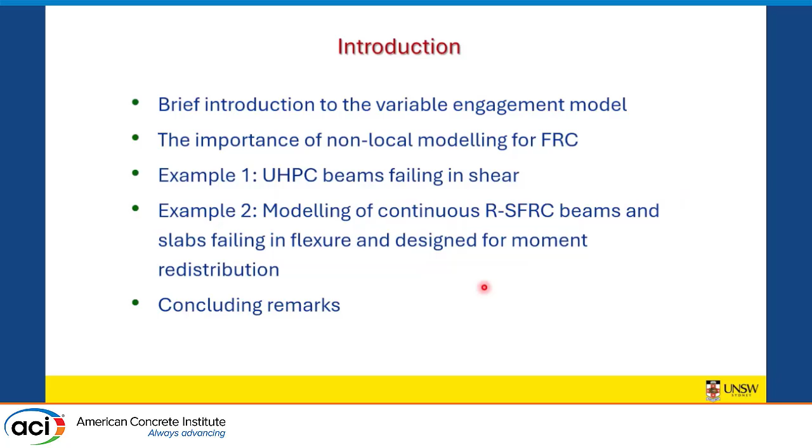I think many of you will know that we invested a lot of time and energy with students in a model which we call the variable engagement model, but I think one of the things that is always nice to know is, well, where did it come from? And it came from this observation.

It was a test by Banthia and Trottier, and we were sitting down one day looking at this particular test. It's a single fibre. We always thought if you could take a single fibre and just add them all up, you should be able to get the end result, right? It's a nice way of thinking of things.

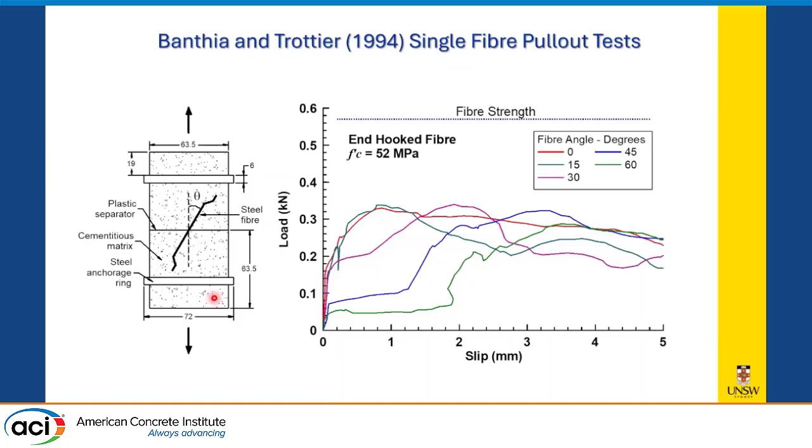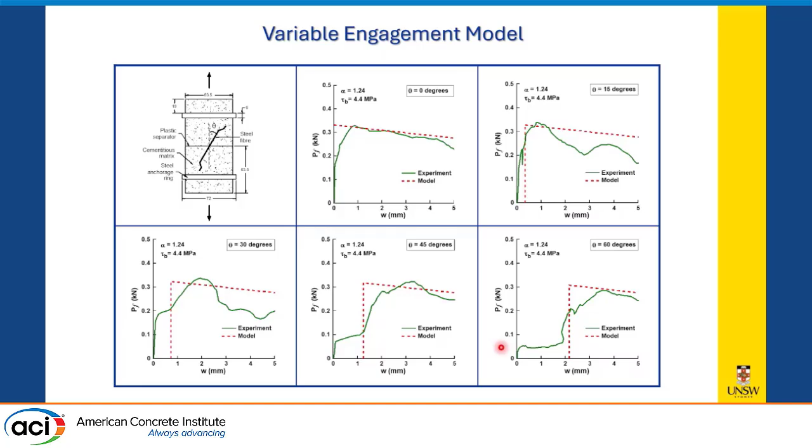And we looked at this and said, well, depending on the angle the fibre's engaged at different points in time, right, you get a lot of initial pull, you get snubbing effects and the like. So this is a fibre at angle 0, it engages quickly. But when you get to fibres up to 45 and 60 degrees, it takes some opening displacement before those fibres actually work for you. So in our domain, where we're looking between maybe 0 and 1.5 millimetres, maybe 2 millimetres, there are a lot of fibres that come in at slight angles that are never going to do anything for you.

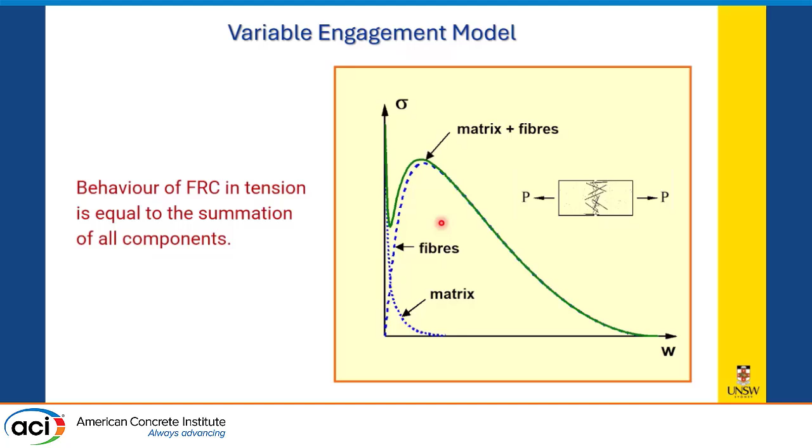And this is it. So you add all that, you integrate every fibre on the surface, you add in the concrete component, and you end up with a curve that looks something like that. And there have been various versions of this over time.

So that was 2003. That was my first, one of my early PhD students, not my first, Jackie Yen Lei Voo, who's moved on to do great work in bridges and ultra-high performance concrete. And this is what it came out to be, really nice.

That global orientation factor just comes into the mathematics that comes out to all those working out what the volume of fibres is, simply the aspect ratio of the fibres, the volume of fibres, and the bond shear stress of a single fibre pulling out, which you should be able to get from tests. Right? So if I do a uniaxial test, I can do a single fibre test at the same time and get that.

In 2007, a student of mine called Greg Lee developed what was called VEM. We renamed that later to VEM 2, Mode 1. He looked at shear. And in shear, the end hook has a lot more importance. In fact, when you look at shear, the straight fibres do nothing. They engage really late, so therefore they effectively don't do anything. So if you don't have a hook, then the fibre doesn't do anything.

Now, this comes to a question which I've never really seen answered yet. So what happens when you have longitudinal shear between the interface of a web and a flange of a beam? Do the fibres actually contribute to that? And I think there's some evidence that they do not. That's an open question.

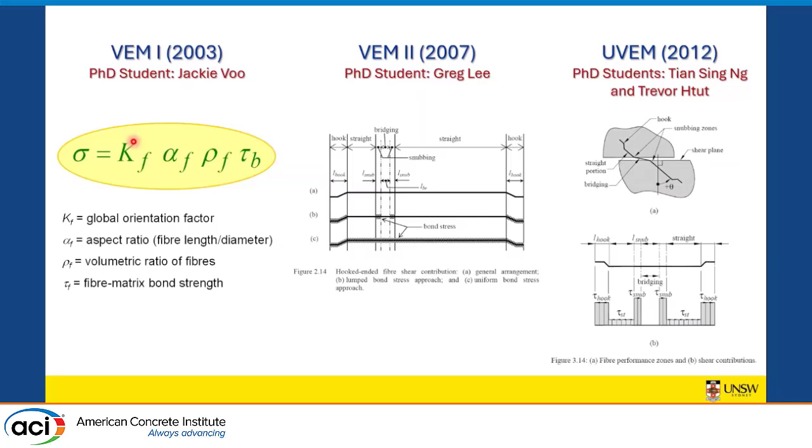And here's the validation of those, and these are tests where they've done the single fibre test to get the actual bond slip of the fibre. So they've actually got that data input into those. And you can see here the models predict the failure, predict the uniaxial strength pretty well.

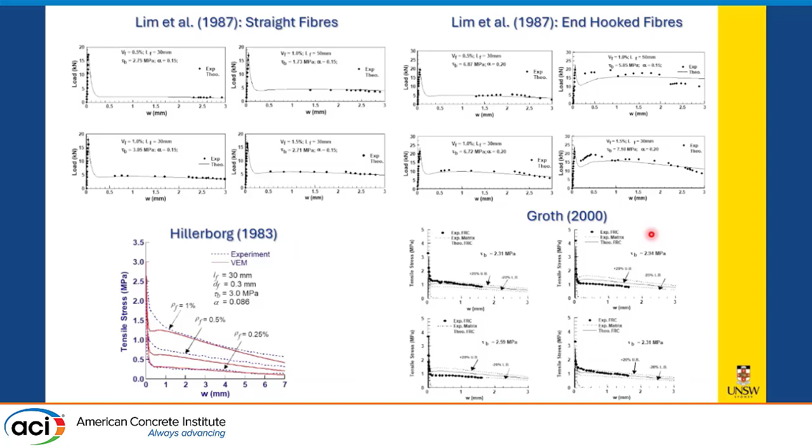Okay, so this comes down to my first example. This is a paper that we presented in Maui. Frank, you might remember, we had a fabulous... I don't remember if you had a car or how we got to the conference venue, or walked.

You went to the car, it was fabulous. We had these really big, luxurious places. Anyway, it was a fabulous conference. One of the things I did mean to mention earlier, I might mention it now, because I've been hearing the last couple of days about Frank and Pink Floyd, right? That's the pacifist Frank. The activist Frank listens to Midnight Oil. That's right, which we found out on one of our great trips.

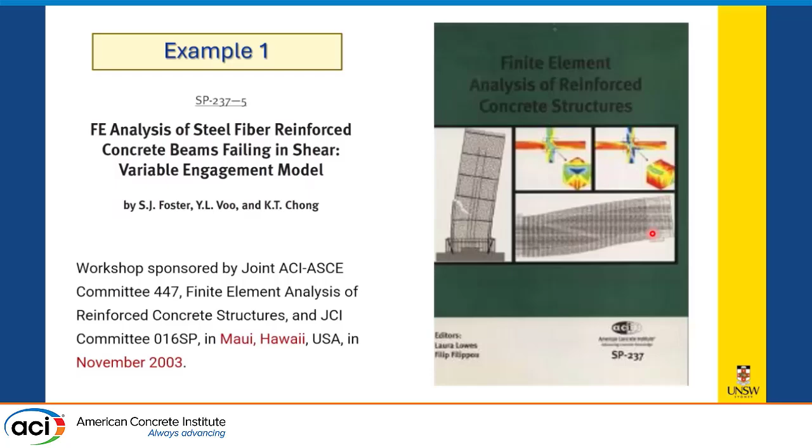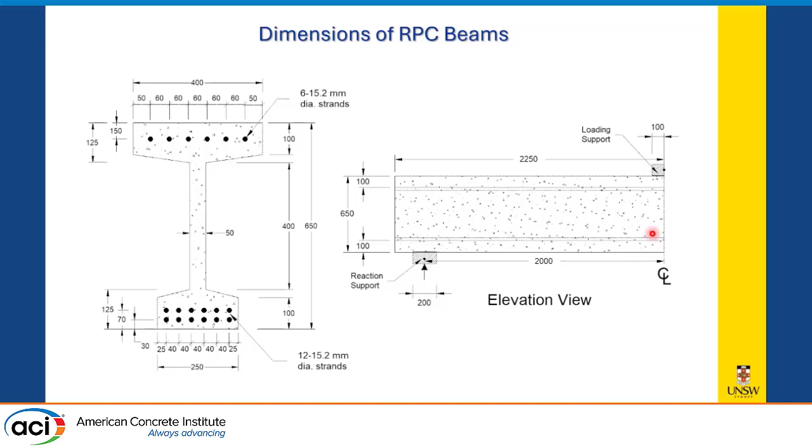Anyway, so we're in Maui, and this is not new work, it's 2003 work. But it comes from the numerical modelling of these tests by Jackie Voo, an ultra-high performance concrete beam, 650 deep, span of 4 metres, with 2.5% fibres, two different types of fibres, end hooked and straight, 170 megapascal concrete, and this is it.

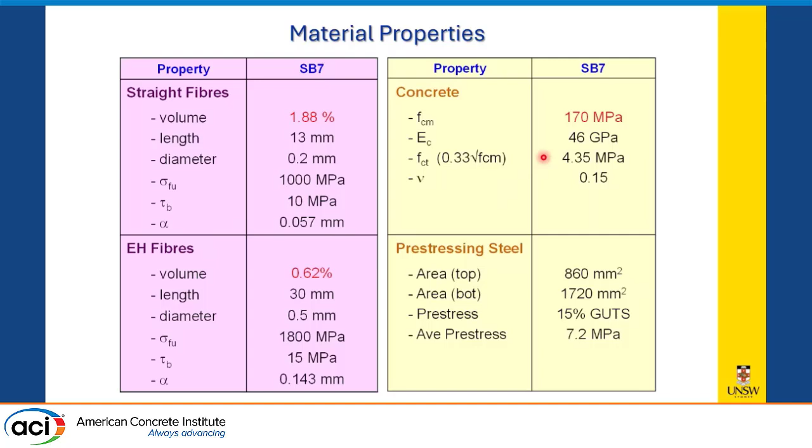So the model allows you to add all the components, the end hook components, the straight components, to get the model here. Now, one of the things, again, just reflecting the importance of this, and I haven't seen much of this in our works, is using non-local models.

And here in shear particularly, in fibres particularly, I think these models have a really good place to be. If we look at this, we're looking now not just at the influence at the sampling point where we're at, but in its neighbouring region. In this particular example, we have a characteristic length for the model of 50 millimetres.

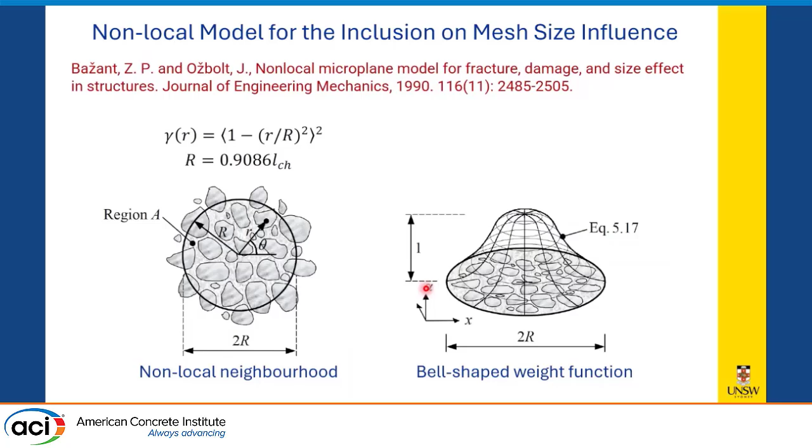So we have about 50 sampling points which we are sampling, and we're weighting those. So it's not just of that point. That has the advantage of taking out mesh sensitivity, the mesh geometry sensitivities. We tend to use square or rectangular meshes. This takes that out to a large extent.

So we're looking at 3 different meshes: a 50 millimetre mesh, a 20 millimetre mesh, and a 10 millimetre mesh, very, very fine mesh. In 2003, that was computationally intense, but it's not in 2025. Computers obviously increased dramatically in their speed, so it's no longer computationally challenging.

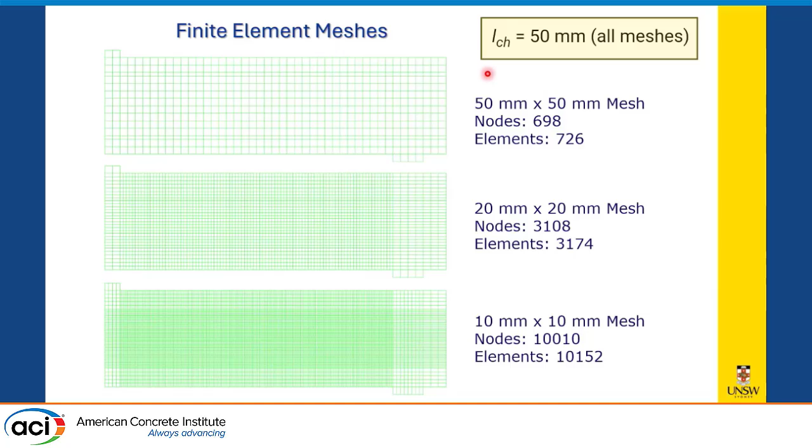All these cases have a 50 millimetre local zone. There we are. So these are the three examples. You can see there is no sensitivity in those examples.

One of the things I always find interesting in this part of the test, it's not much interest numerically, but from a behavioural standpoint it's actually quite interesting, because this is the end of the test. And I ask people how much load that's carrying. If I took this off, it's still carrying 240 kilonewtons, so it's carrying about a third of its failure load. And you say, how? How on earth is that? The fibres are clearly not doing anything at that stage.

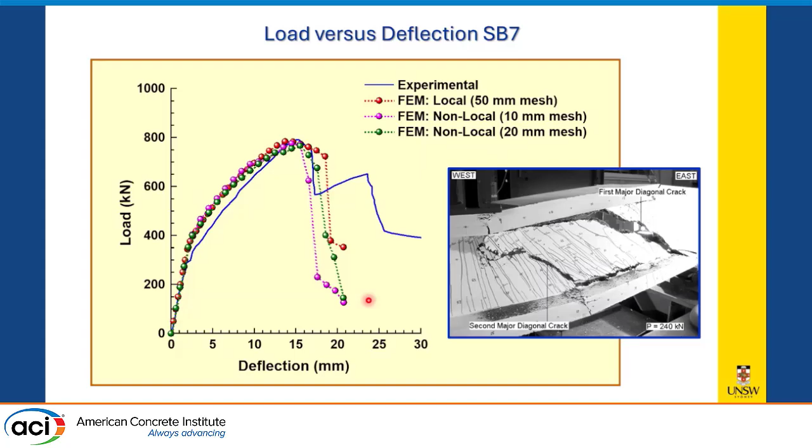Of course, it's the pre-stress, given the arching effects on that. So this part of the curve, there are other things occurring. This is the part of interest, and we see that we don't have any sensitivity there. And this is the failure, this is the 50 millimetre mesh. You can see here, this is the failure crack on the experiment.

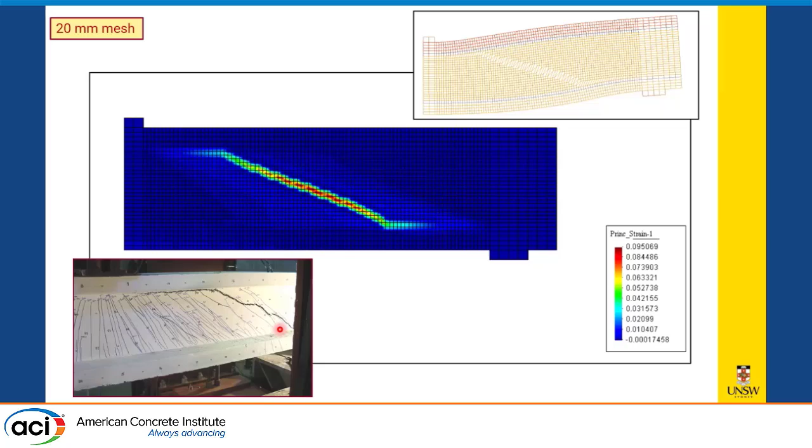This one here is the 20 millimetre mesh, and hopefully this one, if it works... there you go. This shows the 10 millimetre mesh and the change in the localisations.

And you can see here, with the angle of the crack, it's not dependent on the mesh shape or size because it's sampling the regions around it.

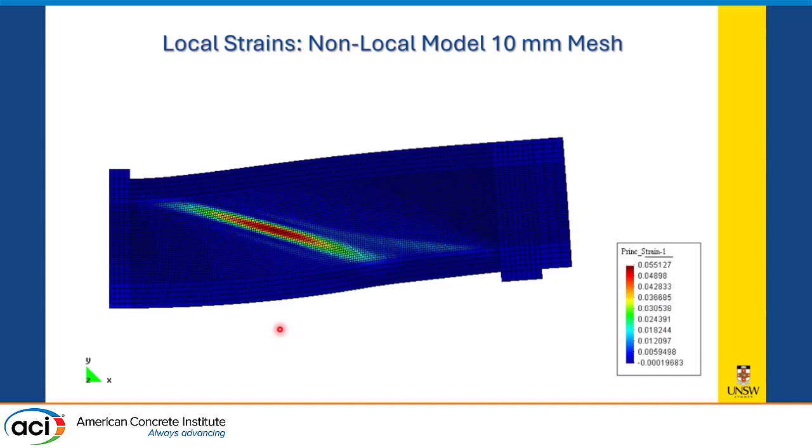There we are. So that's one step before and that's one step after. Again, you can see here the start of the formation of the localisations and the end of it.

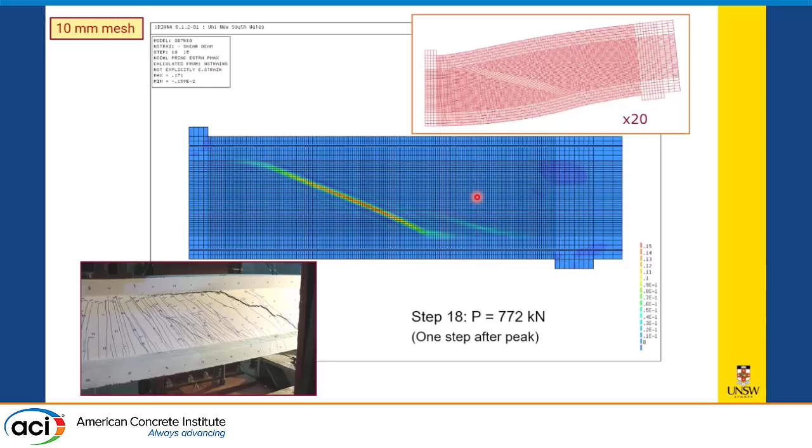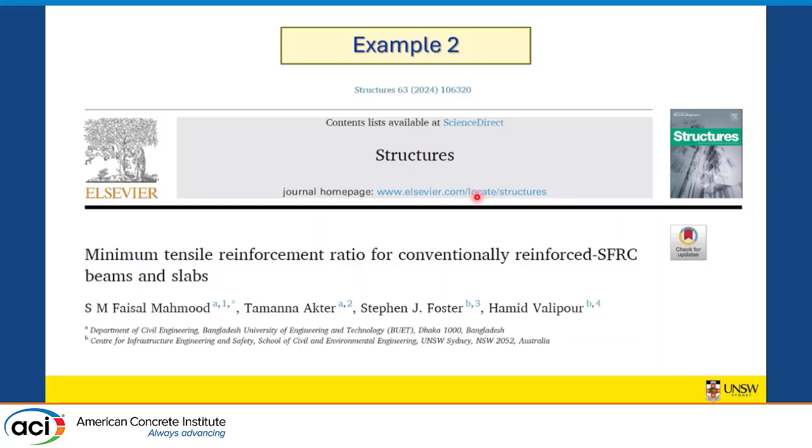This was some tests we were looking at. We wanted to model these beams - a two-span beam, two-span slab. We were particularly interested in the amount of moment redistribution that we could get.

So we designed these for plus or minus 30% of moment redistribution. When we talk about plus 30%, it means we're taking 30% away from the negative and moving it to the positive, and minus, we're moving it from the positive to the negative. This is 400 by 250, this is 220 by 800, 0.2% to 0.4% steel, 0.7% to 1.4% steel in those two cases.

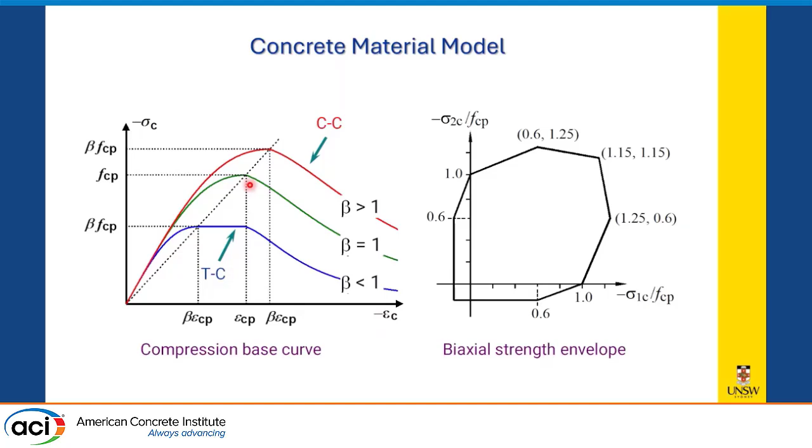All right, so I won't go through the models, but you've all seen these before. They all have their basis back in the modified compression field theory, at least in this part of the curve, and in this part of the curve it's based on the biaxial strength envelope, fairly commonly used.

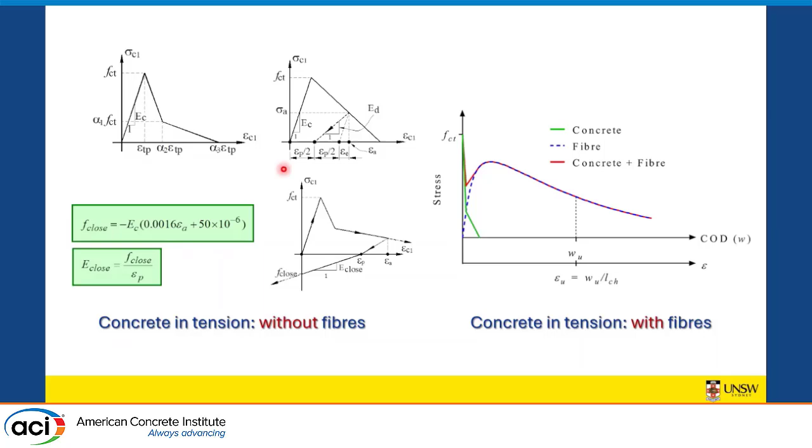Now, first thing I want to point out here - this is not a predictive test. We were looking at parametric studies. We wanted to see what happens when we change certain parameters, but we wanted to get the result as close as we could to the experiment.

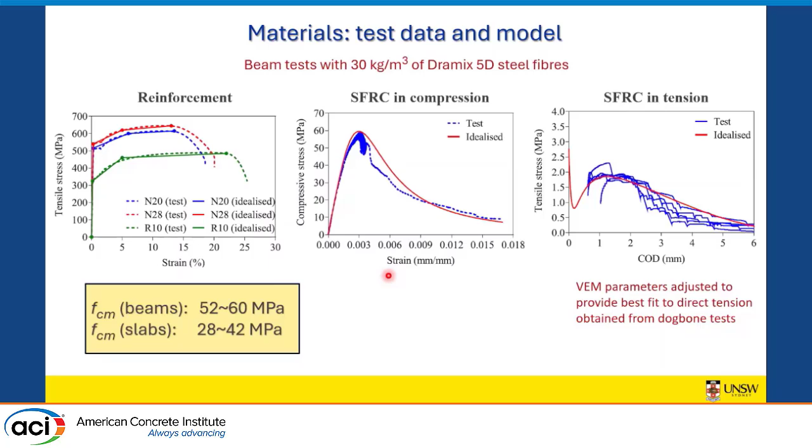So the model is tuned to the experiment. But I want to reflect on some of these points.

So when I say that, here we look at the experimental crack spacings. In this region, the crack spacings in the negative moment regions are different to the crack spacings of the positive moment regions, and we knew those crack spacings, so we put them in. We said, this is what we're going to base the fracture energy on - these known parameters.

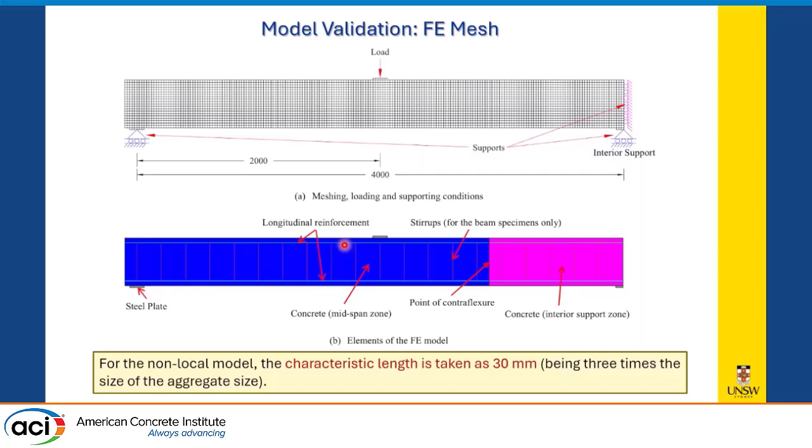And we'll reflect on this in a moment. In this case, the characteristic length is 30 millimetres, and you can see here, not unexpectedly, we get very good correlations. This case here is just comparing load versus deflection.

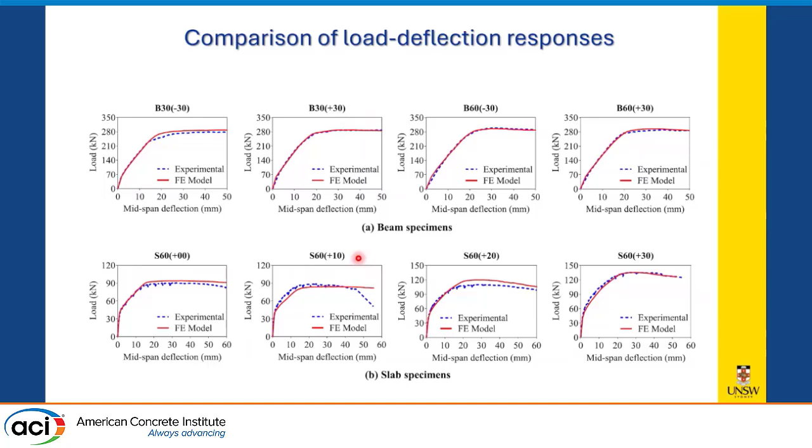So minus 30% for the beams, plus 30% across. The slabs 0, 10%, 20% and 30%. And you can see the correlation there is pretty good, as you would expect it to be.

When we look at the cracks themselves, this is the beam experiments and slab down the bottom. The darker lines are the experiments, the coloured ones are the numerical models over the experiments, and we see again the models are reflecting what we see in the experiments.

And so the point of this was then to look at other combinations. We're confident we're starting off at a good point. The crack widths here, we're getting 13% on average there, 0.89, low coefficients of variation.

For cracks, that's pretty good. For the strengths, we're within 1% to 4% of the actual strengths themselves.

Let's think about this then - okay, what if we don't know this information? We don't have the experimental data. What's important here? If we're looking at strain softening behaviour in fibres, the most important thing is going to be the crack widths. If you don't get the crack widths right, you can't get the effect of the fibre right.

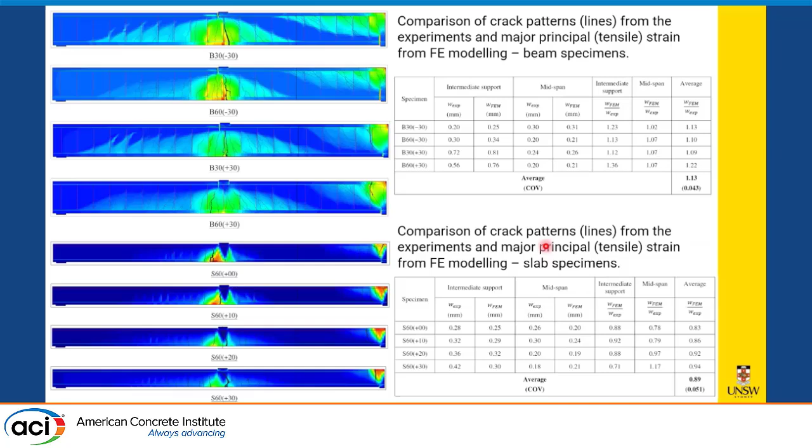What's important? Crack widths, crack spacing. If you can't get the crack spacings right, you can't get the crack widths right. So crack spacings is really important. And this is an area where more research is needed.

We've been looking at crack spacing equations for shear on simple models for a different purpose, and wow - they are not only complex to understand, they are messy, they're noisy, the degree of accuracy is, well, disputable. So does that matter? Well, that matters.

It doesn't matter as much if you've got something like this, where you've got a fairly good plateau. So these other tests, we've been using 5D fibres, and the early tests were 3D or straight. These particular fibres have a fairly low plateau. And if we're looking at maybe 1 to 2 millimetre crack widths at ultimate, it's not going to affect it that much. But this fibre here, this is a twisted fibre, and it has a very high softening - it's going to affect it a lot.

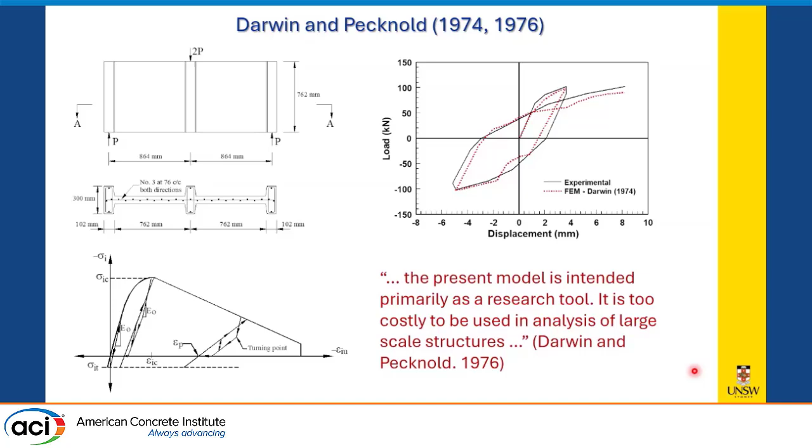So I think the performance of the fibres is very important here. If you can get a fibre that performs more uniformly, more likely your model will not be so sensitive to these things. And reflecting on this statement of Darwin and Pecknold: the present model is intended primarily as a research tool - it's too costly to be used in analysis of large-scale structures, and that was in 1976. That is no longer the case today. I saw Jan Cervenka here in the audience with their model ATENA, Frank's with model VecTor2. These now are tools that can be used in design.

And this is it, one minute. Perfect. Thank you. All right, so accurately modelling behaviour can be challenging. Crack widths need to be accurately determined. This, to me, is the area we need to put some effort into the research.

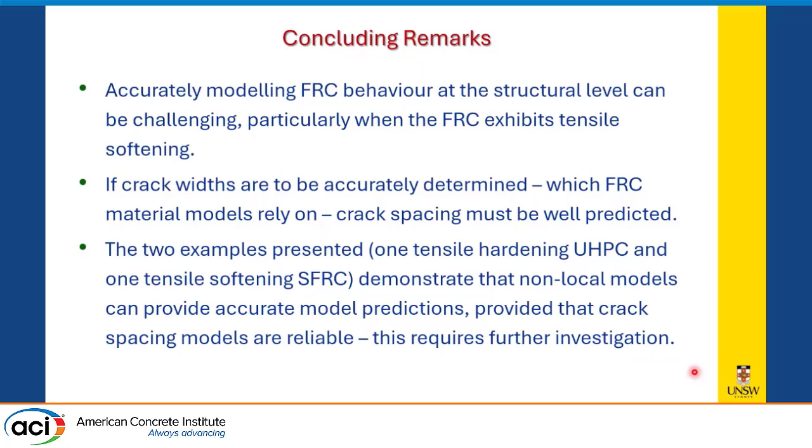I firmly believe in non-local models when dealing with this, because it's really quite sensitive to the actual shape of that failure surface and percentages.

Frank, can I just say good luck for the rest of your career and time.